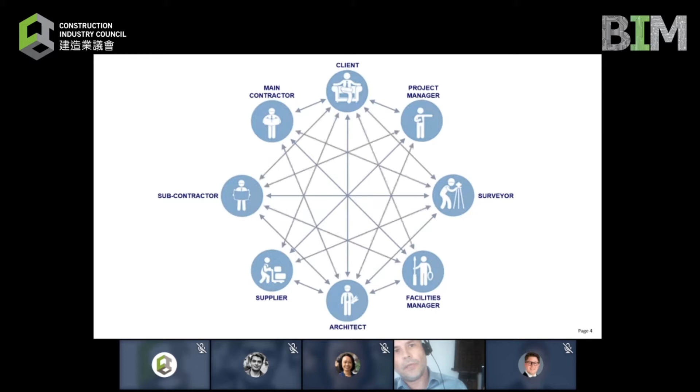Now, why is it so? That's because for something as complex as a construction project, which involves many stakeholders, there are typically various paths of seeking truth. And the truth found this way may be subjective, depending on who you ask. With time and with complexity of our projects, the communication lines may become even more convoluted and result in conflicting and unreliable information. I'm pretty sure all of us had a chance to experience this at some point of our career.

This is why the concept of the single source of truth appeared, to simplify communication and provide a truly reliable source of information. Single source of truth is supposed to be the heart of the project, where all the parties constantly provide their input and view the input of others.

So let's look at what should be the main features of a single source of truth. All content, all information exists in one place. All content is also developed and reviewed in this single place. Every party has access to the latest versions of the content, obviously based on their access rights and privileges. So CDE has to be equipped with a mechanism of access control. And all publishing occurs from this single place.

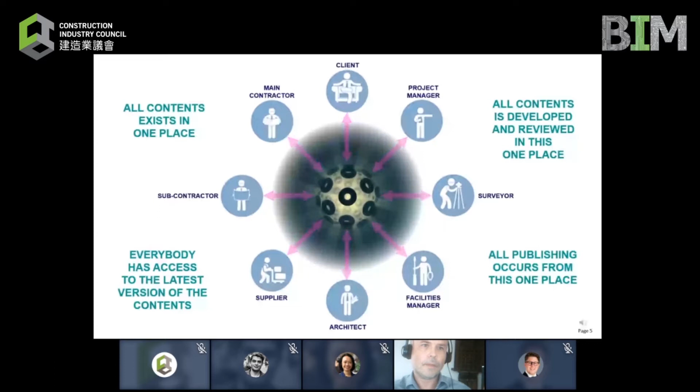So now it's time to ask, is CDE really a single source of truth? So should we have one CDE or many? Let's look at what some of the important players in the market think about that.

BSI, British Standards Institution, the organization behind the famous standard PAS 1192, now superseded by ISO 19650, states that common data environment is a single source of information for any given project, used to collect, manage, and so on. So it is a single source of information.

ASITE, one of the digital engineering consultants, maintains that common data environment is a single source of truth for a project, as simple as that. RIBIM, another technology innovation consultant, according to them, CDE is an essential part of BIM, acting as the single source of truth. Oracle, global database technology leader, they say that CDE is a single source of project truth as well. And National Building Specification from UK also defines a CDE as the ultimate source of truth. Why truth is actually in quotes on their website, I'm not sure, but I hope it's real truth.

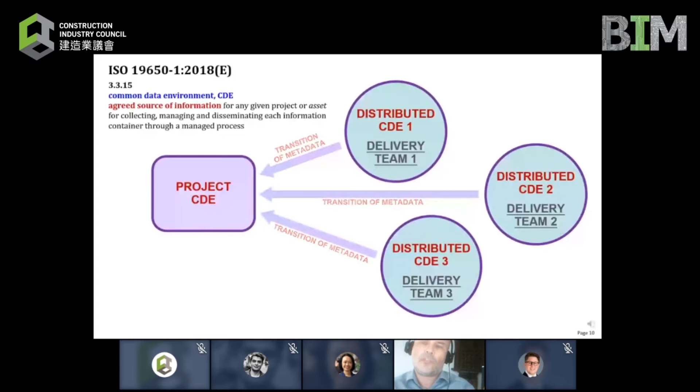Of course, not easy doesn't mean impossible, but still, following this idea, they introduced the concept of multiple CDEs: a project CDE, which should really be the only one, and so-called distributed CDEs owned by different delivery teams, for example discipline teams. Distributed CDEs need to transfer metadata to the project CDE in order for the whole system to work properly, because what we need is the updated information in a source that is accessible to everyone.

What is metadata? For those who may not be sure, that is just a set of attributes for information, like name, author, revision status, submission date. There may be much more.

Now, interestingly, a recently issued guidance document, a thick book for ISO 19650, states that in reality this transfer of metadata is often a manual process. What? A manual process, and in practice may not always be possible. So we can clearly see that there is a gray area, even in the ISO 19650 standard, over what the CDE really should be and how to implement it.

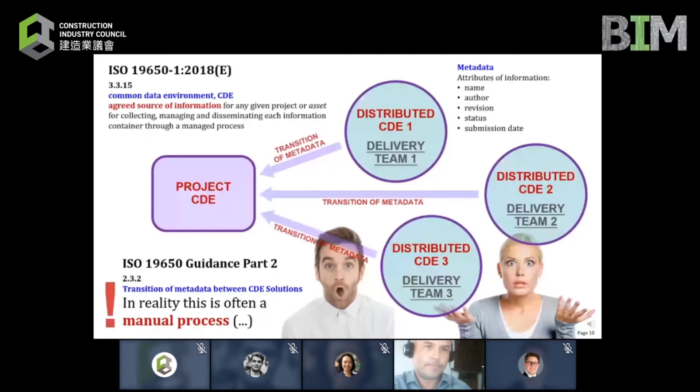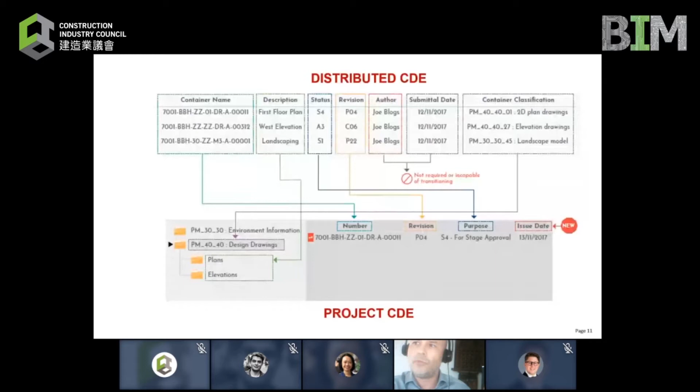This is an example from the guide in question, which shows how metadata would have to be transferred from a distributed CDE into the project CDE, which looks pretty complex, if not scary, especially if it's going to be done manually. In information management, we definitely do not like to do things manually, like typing. They actually state in the ISO 19650 guide that it may be, or it is, in practice, a manual process, which sounds really, really scary.

Given all this, one project CDE should be the first thing to try, before attempting more complex solutions with multiple CDEs. When we have one project CDE, we are absolutely sure that all delivery teams communicate according to the same protocols, and all information containers use the same metadata.

An information container, by the way, is just a package of information. Most of the time in our practice it's just a file. A computer file is an information container—one example of it.

The common metadata include information lifecycle states—what was mentioned before as work in progress, shared, published, and archived. But also revisions, revision management, status codes or suitabilities, various security and access settings, and integrations with applications if there are any. A proper CDE should have all of this.

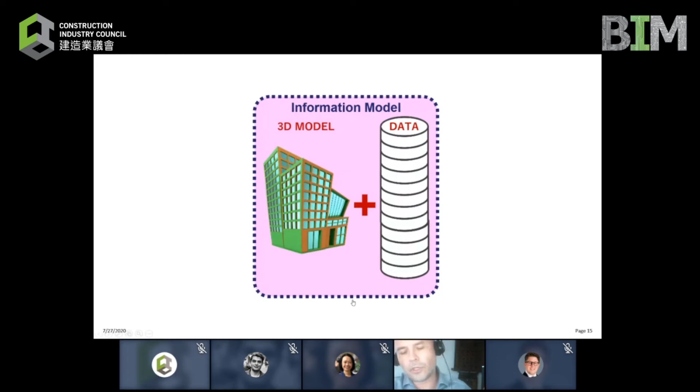We know that the main source of project information is the information model—that's the name by which, in the industry, we commonly mean a BIM model. BIM here is building information modelling, to avoid the building information model problem. This includes a proper 3D model plus a lot of data, which Emilia talked about so much.

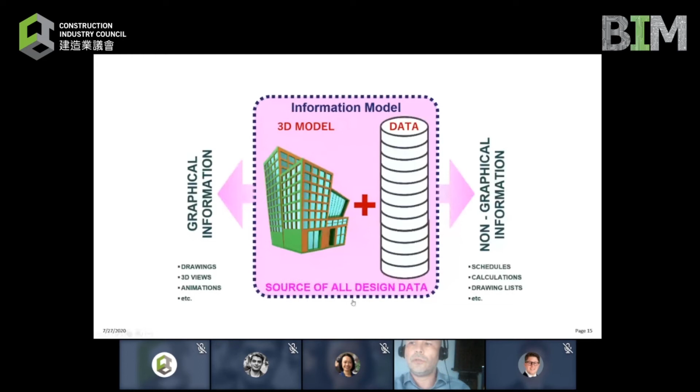During the project, there is a lot of design output from this information model—be it graphical information, drawings, 3D views, animation, and so on, or non-graphical: schedules, calculations, drawing lists, and many more. Obviously, this makes our CDE the source of all design data, and all these design outputs need to go and be stored in our common data environment.

But there's more—a lot more information about the project not traditionally generated from the model. Within the organization, it can be contracts, emails, design sketches, etc. And from external stakeholders, we can have comments from consultants, reports, approvals by statutory bodies like government, etc.

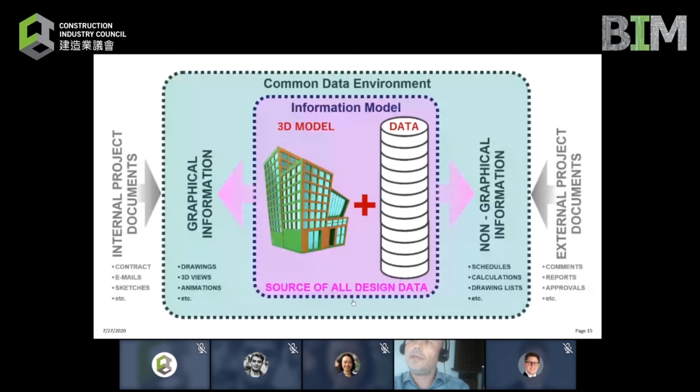Following the model of all the data within a common data environment, all this information should also be stored in our CDE, making it effectively a source of all project information.

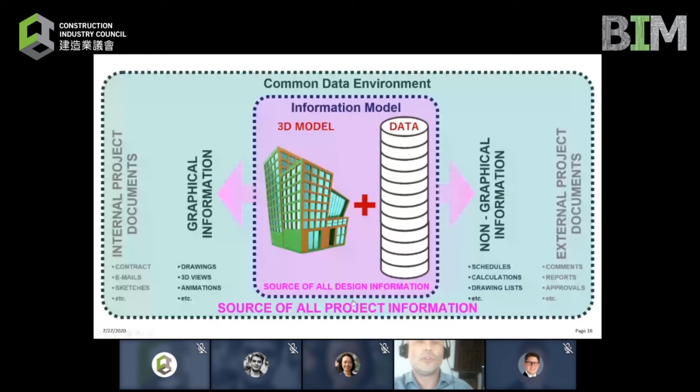After going through this thought process when establishing our CDE, we have to decide how our CDE will be physically, and where it will be physically hosted—will it be hosted on our premises within our organization, or in the cloud, provided by external providers?

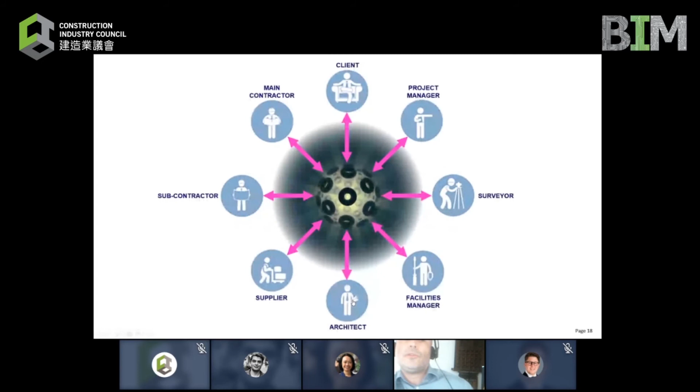In case of a cloud-based solution, our single source of truth will be moved somewhere to a remote server, likely beyond our control and even beyond our jurisdiction. But still, even a cloud solution, as compared to an on-premises solution, is still a centralized CDE. And a centralized CDE means a single point of failure.

In the worst case scenario, this may result in service outage if something goes wrong with this single point of failure and it actually fails. If not that, we can have service slowdowns and things like that happen.

There are more threats coming from cloud storage, and one of them is vendor dependency. The data owner may not always have full control over their data, which is located somewhere remotely. That may make owners of sensitive data—especially governments or military organizations, or even big infrastructure developers—a bit uneasy.

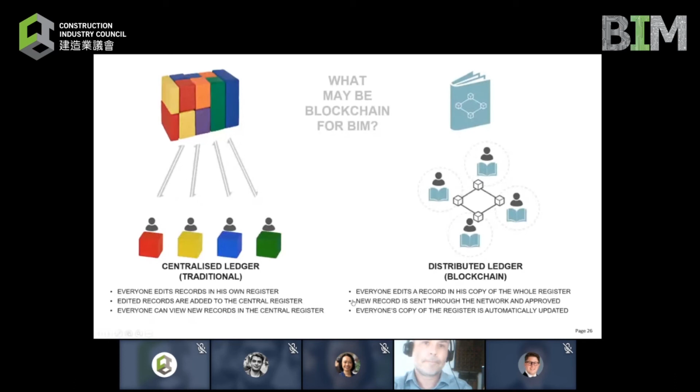Now, what may blockchain be for BIM? Let's do a simple thought experiment. If I replace this register with a building, or sort of, and those separate registers with disciplines, and change the wording a bit, we will have a situation when everyone edits his discipline model, edited models are periodically federated, and then everyone can view changes in the federated model, which brings us to a definition of BIM level 2. So that's a traditional register, a traditional ledger.

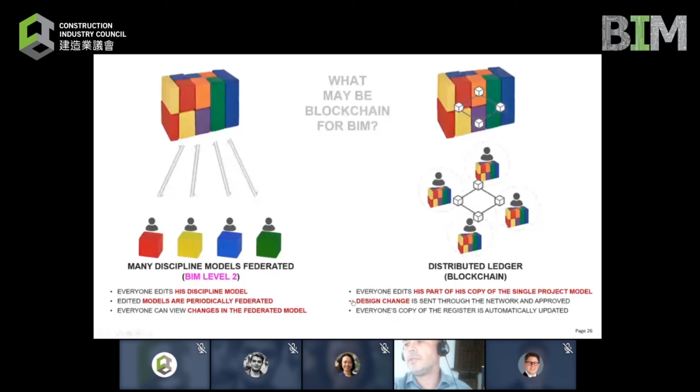Now, what happens in case of a distributed ledger? We do the same thing, replace the register with a model, but implemented or stored in a blockchain, and those registers by copies of this model with every party. What happens then is that everyone edits his part of his copy of the single project model. A design change is sent through the network and approved, and then everyone's copy of the single model is automatically updated. Now this sounds like a definition of BIM level 3: a single model containing all disciplines and edited at the same time by various parties.

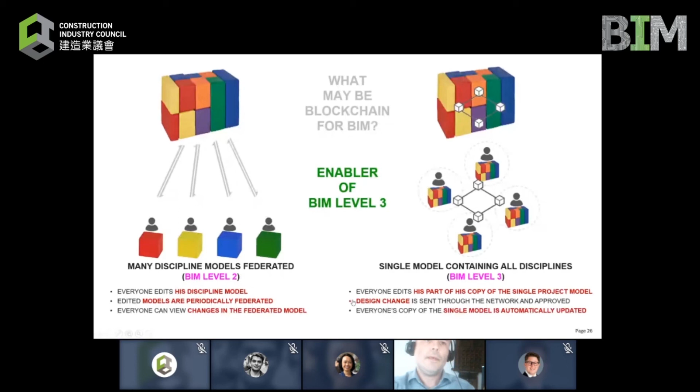So that means that, among other things, blockchain can be the enabler of BIM level 3 that we all strive to achieve. But there's more. Blockchain mechanism ensures distributed secure cloud storage and elimination of the single point of failure. Furthermore, a built-in approval mechanism for any information being transferred. Any information obviously may mean design changes.

Trusted, immutable, time-stamped record of all project changes and events. Very, very important thing for projects and for very important functionality of CDE. And the right to edit and ownership of information always with the authoring party. Also one of the issues which for years has not been solved within the BIM industry. For example, when somebody does a very, very complex family or component and includes it in the project, it's available to everyone, for everyone to see and use, without any ownership rights and without any protection of intellectual property.

Based on those features, blockchain can enable so-called smart contracts, one of the most promising uses of blockchain, which are based on if-then conditions secured in the blockchain and can be executed automatically.

For example, within the design stage, when the design package is submitted, it's checked from various points of view by the client, and then the smart contract logs those changes and executes itself automatically, releasing payment.

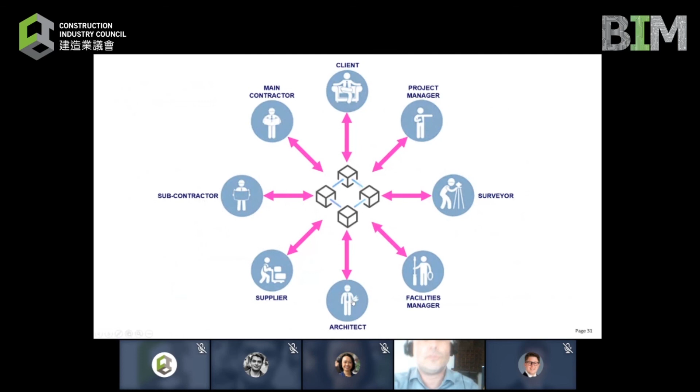So, can blockchain technology be the ultimate method to implement a true single source of truth, or this holy grail that we are all waiting for?

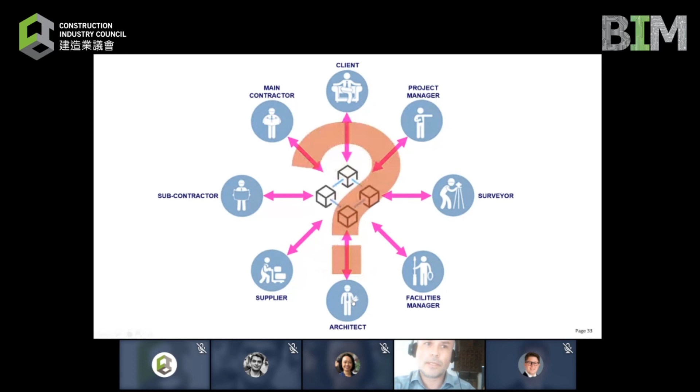It pays to be always cautious, like with any new technology. It pays to be open for changes yet cautious, so as not to get hurt early in the process.